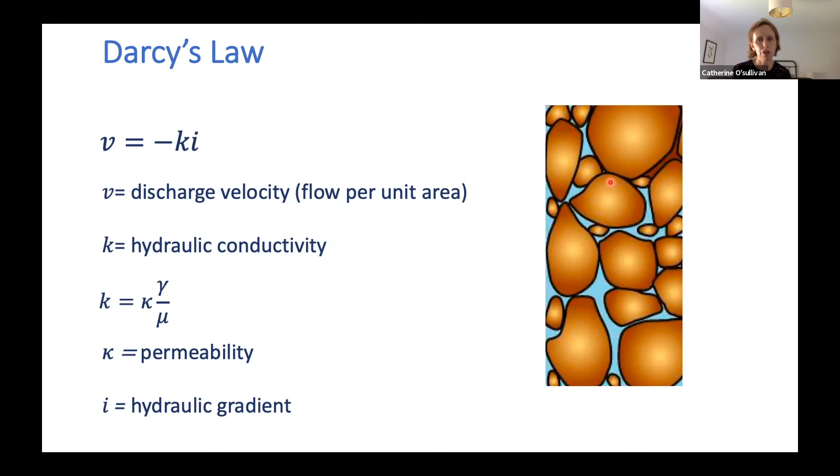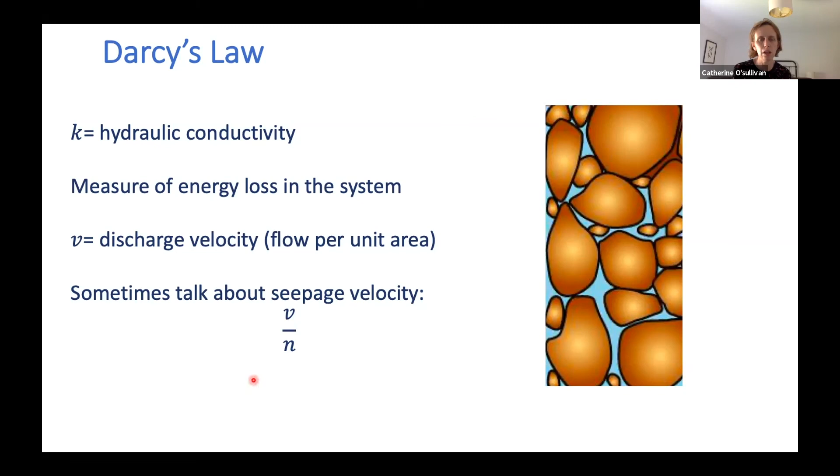And obviously, i is our hydraulic gradient. And when I'm teaching, I like to remind our students that that's really a measure of how the energy in the flow is changing as the fluid moves through our soil, and a cartoon here to remind us about what that might look like. So in geotechnics, we then recognize that this discharge velocity isn't really a velocity, and we could correct it and say, if we divide this discharge velocity by our porosity, that's the real velocity of the water within the pore space. So this is something that you will see in textbooks for soil mechanics students.

And as I've said already, for more than 15 years, I've been teaching a course that's solely dedicated to seepage and consolidation, or the flow of water through soil, to postgraduate students. And I designed this experiment using one of the pieces of apparatus in our teaching lab. This is a rigid wall permeameter. We've got manometers coming out at the side, connected here to these standpipes, where students can read the total head at various points along the side of the rigid wall permeameter, and then get an understanding of the relationship between this gradient and the flow rate, which they can measure. We have the flow coming through from the bottom, and then they can use a timer and a graduated cylinder to measure the flow coming out of the top.

But the thing I realized, more than 10 years ago, is that it's quite interesting to put two different types of sand into the rigid wall permeameter, a coarse sand and a finer sand, and to then ask the students, where is the flow fastest? And this really flummoxes them, because intuitively, a lot of them want to think about flow in the individual pores, and they recognize that these pores in the coarser material are more open compared to the pores in the finer sand. But yet they have Darcy's law, and they're unable to take Darcy's law intuitively and apply the principle of mass conservation to realize that the discharge velocity is the same in both layers. They really struggle with that. So intuitively, this macro scale description using Darcy's law, when students are forced to really think about things, it starts to break down.

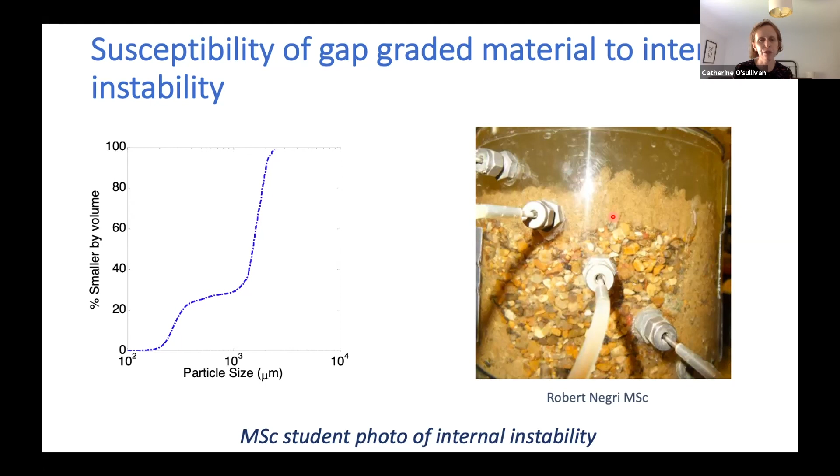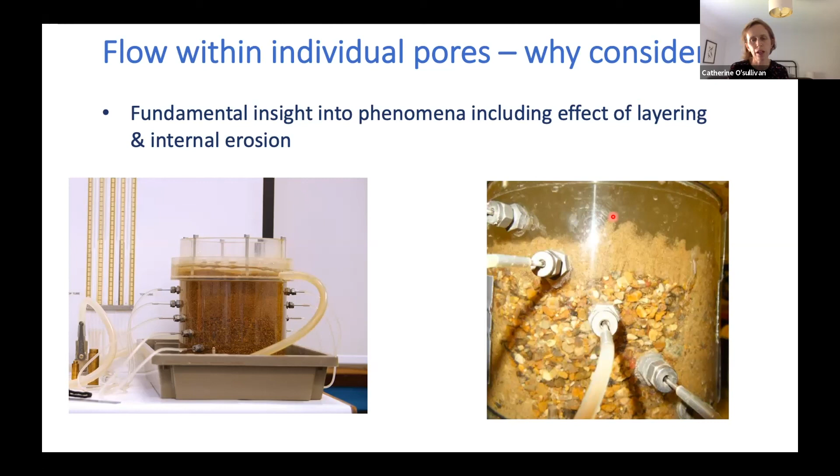And the most famous case study involving internal erosion is the near miss at Bennett Dam in British Columbia in the mid-1990s, where they discovered a major sinkhole caused by this. So these problems have real significance for our embankment dam and levee infrastructure. So that's why I think we want to be able to look at flow at the pore scale to aid our students' understanding of these phenomena, and then also to advance understanding and improve our ability to predict instabilities such as internal erosion.

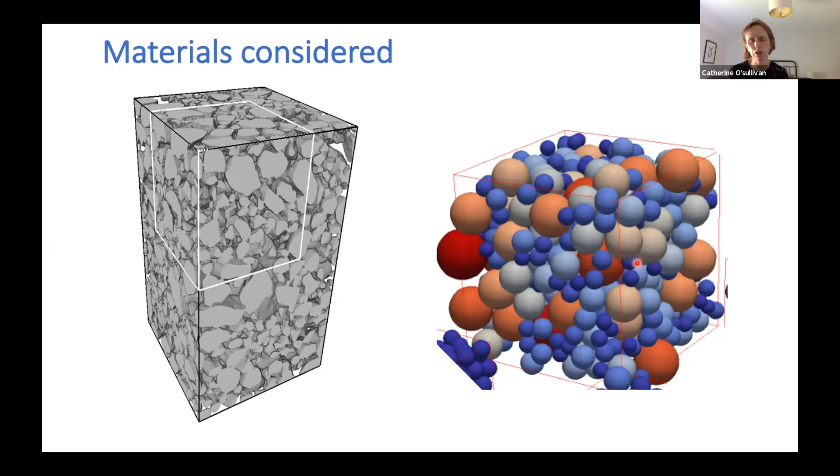So I'm going to talk about some experimental work carried out by a PhD student called Howard Taylor, and numerical work carried out by a PhD student called Chris Knight. Howard spent a number of years in industry before doing his PhD, so he approached this from a very applied perspective, while Chris was a physicist and looked at things from the perspective of a physicist. So two very different students, but looking at the same problem, and their two perspectives I think are quite interesting.

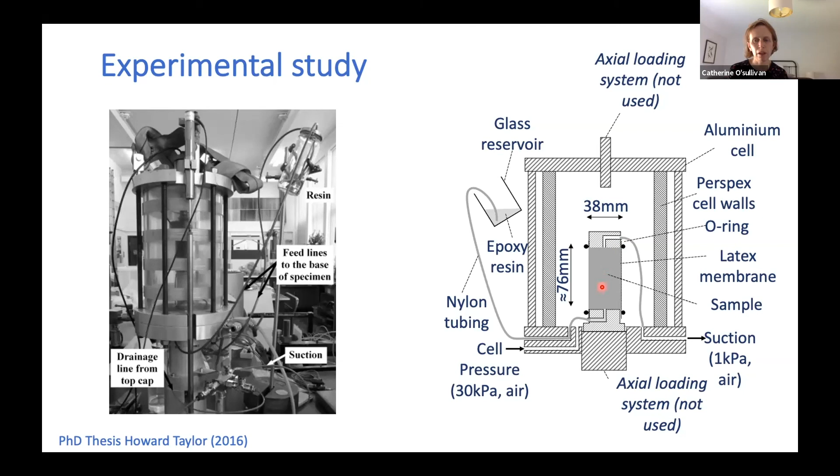So this is a photograph of the apparatus that Howard used in the lab. So he took a sample of sand and put it into a standard triaxial apparatus, consolidated or compressed it to a particular isotropic stress level, and then he impregnated it with an epoxy resin. So an epoxy resin was drawn up using a suction through the sample in order to glue the particles in place. He then took a subsample of this to a materials micro-CT scanner, and he used a scanner based at Queen Mary University, which is also in London, just a ride away on London Underground.

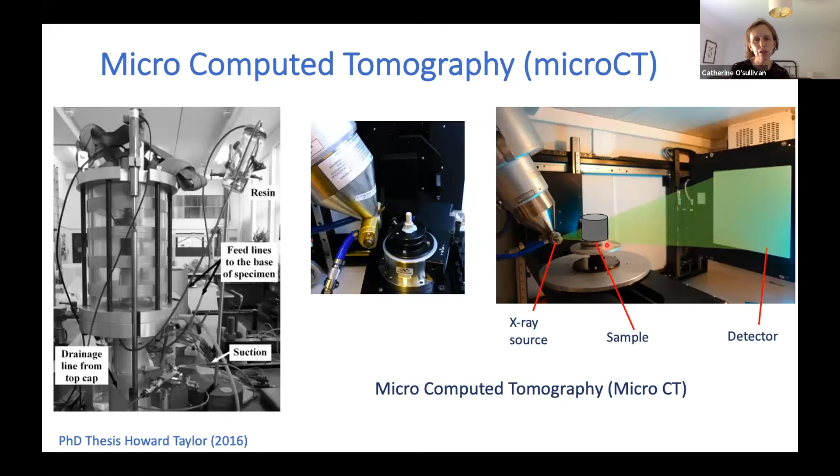And he put his sample between a source and a detector. And this sample was rotated in a controlled manner. And for every about 1 degree of rotation, a radiograph was taken. And so a radiograph is the kind of X-ray image that's recorded when you break your arm. But by taking these large set of radiographs, where the sample is rotated in a controlled way, we can get a 3D image or a tomograph of our material that allows us to look at the pore space in 3D.

And Howard looked at different sands with different coefficients of uniformity, or rather, I should say they're the same sand, they're both Leighton Buzzard sand with different CUs. And a CU of 3 means there's a broader distribution of particle sizes within his sample. And he also looked at some glass ballotini with a slightly different particle morphology.

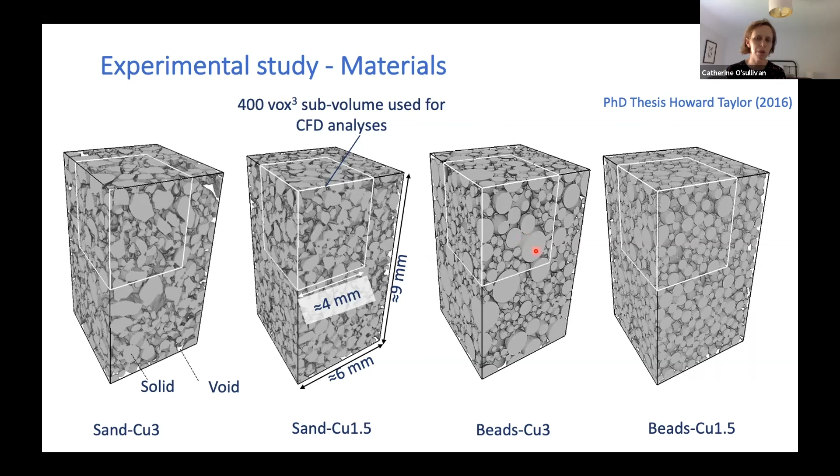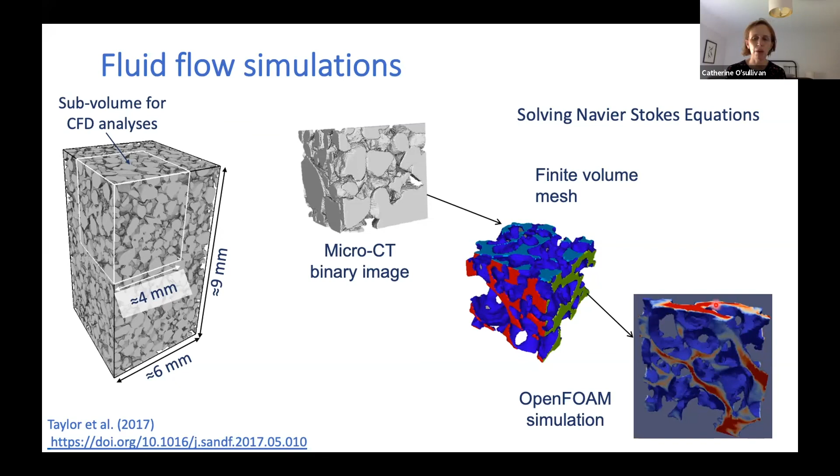And Howard took subsamples from these scans and used them as input to a CFD analysis. And in order to do that, he looked at the gray scale of the images and decided which gray colors are associated with the particles and which gray scale is associated with the voids. So he did what we call a binary threshold to segment the void and the particle space, and used that as input for his CFD analysis. So he did his binary image. He used a finite volume mesh within the image using OpenFOAM and solved the Navier-Stokes equations to get an understanding of the flow within the individual voids or within the pore space.

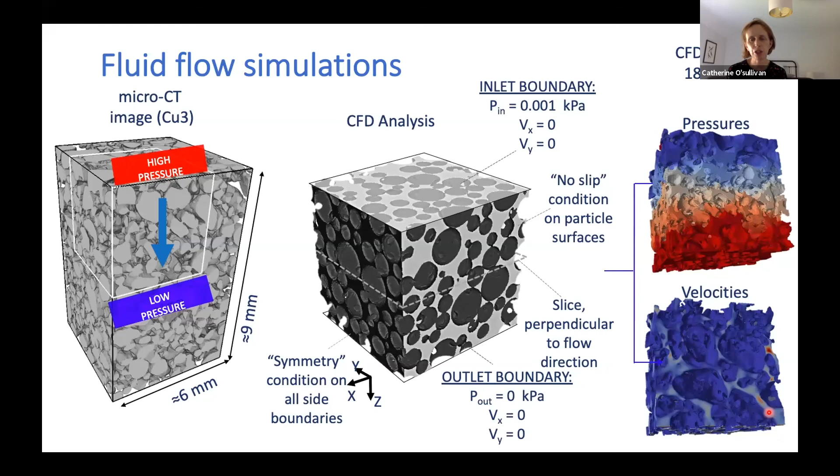So he simulated, in all cases, a laminar flow scenario where there was a pressure gradient applied across his sample. On the surface of the individual grains, he applied a no-slip condition, and he used a symmetry boundary on the vertical sides, and then flow moved downwards, as I said, under a controlled hydraulic gradient. So we have a controlled pressure gradient here. And from that, we can get a map of the distribution of pressure within the void space and also the velocity of flow. And I think that this kind of approach to looking at flow within a porous media is where we need to go to really understand these issues from a soil mechanics perspective.

Howard did some verification by carrying out some experiments in the lab where he did permeameter tests. And he confirmed that his lab results were reasonable when compared with the CFD results. Acknowledging, of course, we wouldn't expect a perfect match because you'll always have some boundary effects within the lab that would not be evident in your small subsample that were considered in the CFD analyses.

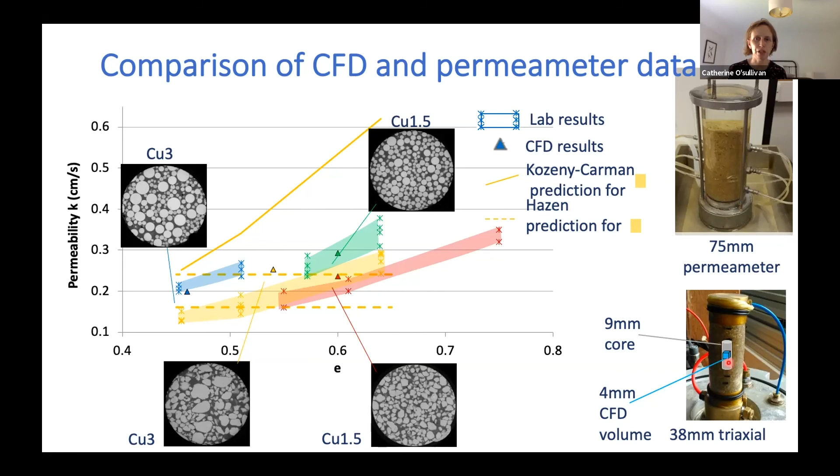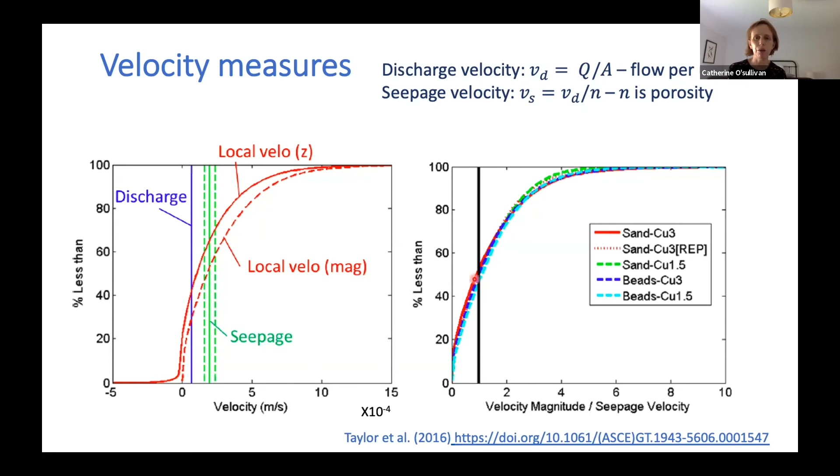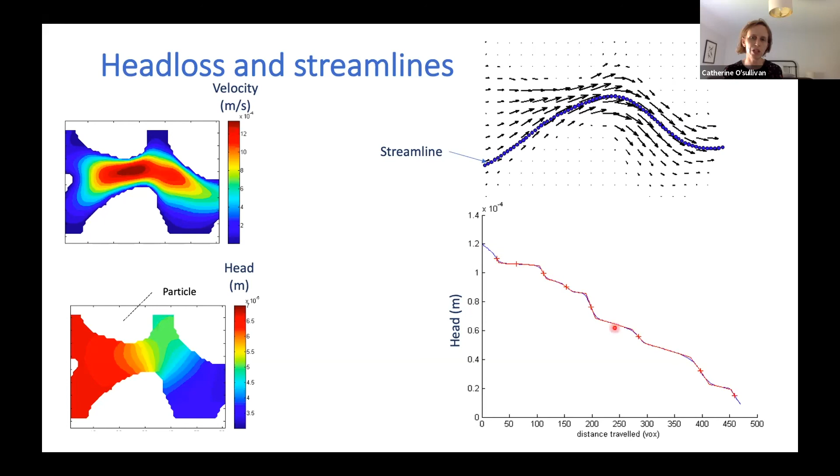And we can trace streamlines through the flow, and we can see that where we get the biggest head loss, or the biggest gradient in head, is associated with these constrictions.

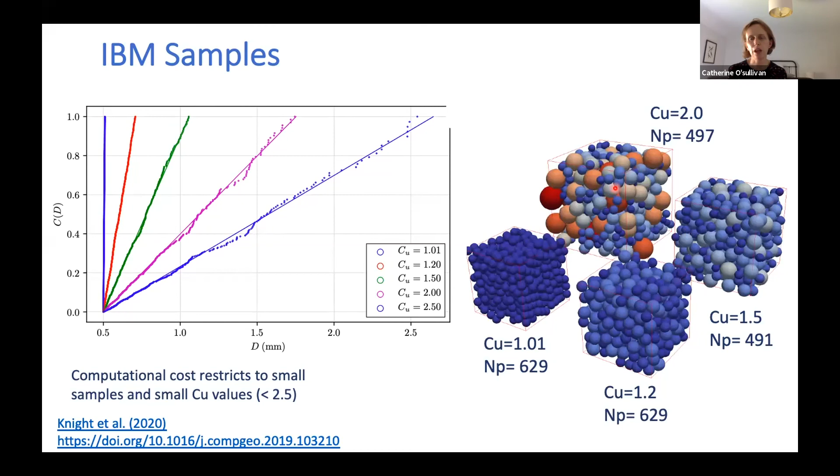Chris Knight, who's the second student I spoke about, he created his samples using DEM, and he simulated the flow around them using the immersed boundary method. Again, he's doing direct numerical simulation, but using the immersed boundary method to enforce the boundary conditions at the surface of the particles. And again, he traced streamlines through the void space.

He looked at where his pressure gradient was the largest, and using a triangulation-based approach to partition his void space, again, he found that where he had his constrictions, that is where two voids meet, that's where he gets the biggest pressure gradient. So by doing this sub-particle scale simulation, we're starting to get proper insight and confirm our hypothesis that actually underlies the Kozeny-Carman equation. So I think this is really important.

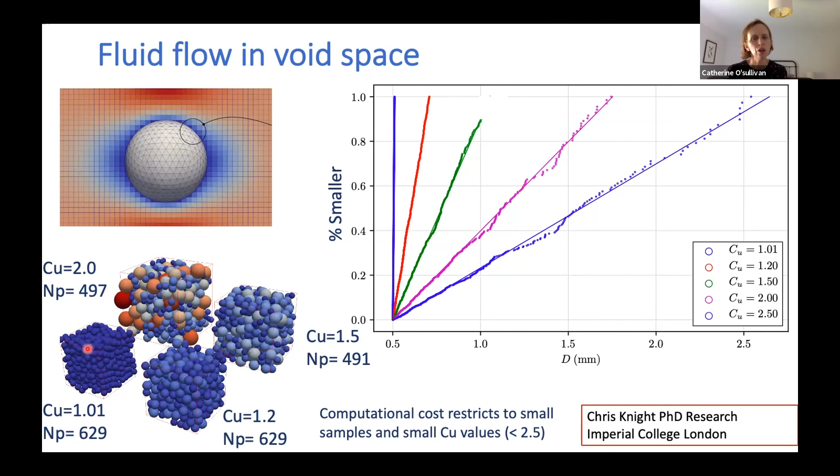These equations based on the monodispersed packings, they don't accurately capture the forces on the individual grains. They underpredict the force on the large grains, they overpredict the force on the small grains. And that's really important because if we want to simulate movement of particles using what we call unresolved CFD-DEM, we need to know these forces accurately. And I think this is an area of research we really need to pay attention to in soil mechanics.

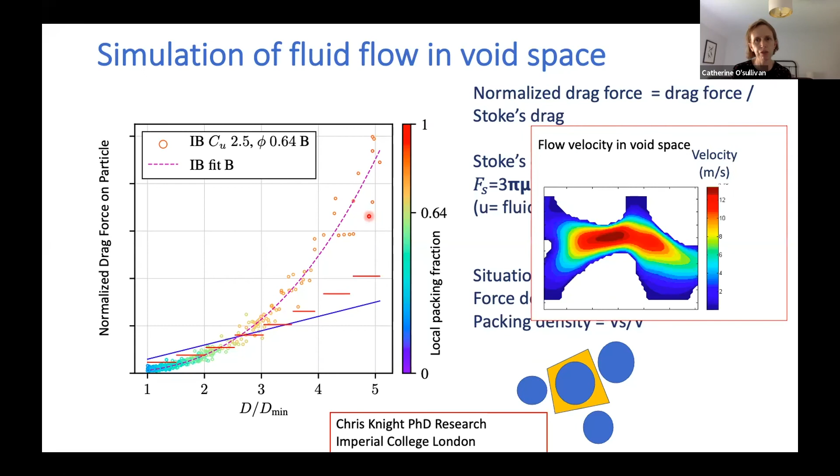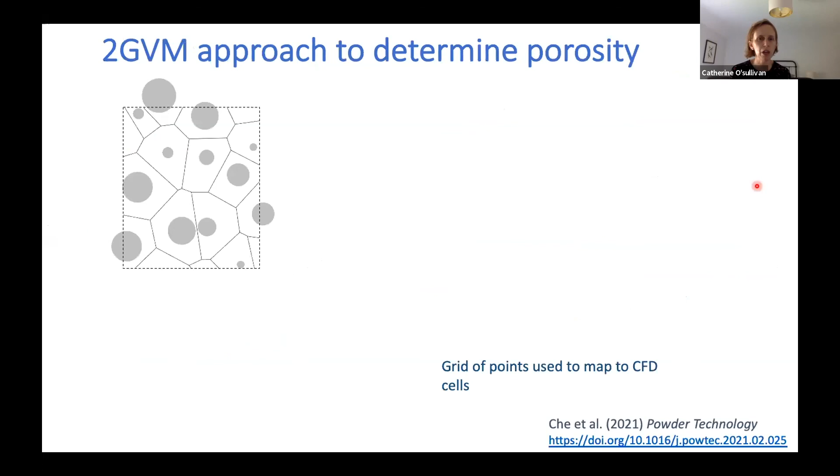And we really need to develop our ability to accurately measure, model and predict drag if we're going to look at the kind of issues I was talking about at the beginning, such as how flow heterogeneity can start to cause erosion in flood embankments. And we've been looking at different approaches to determine this in a computationally efficient way. We've been developing approaches based on Voronoi tessellation.

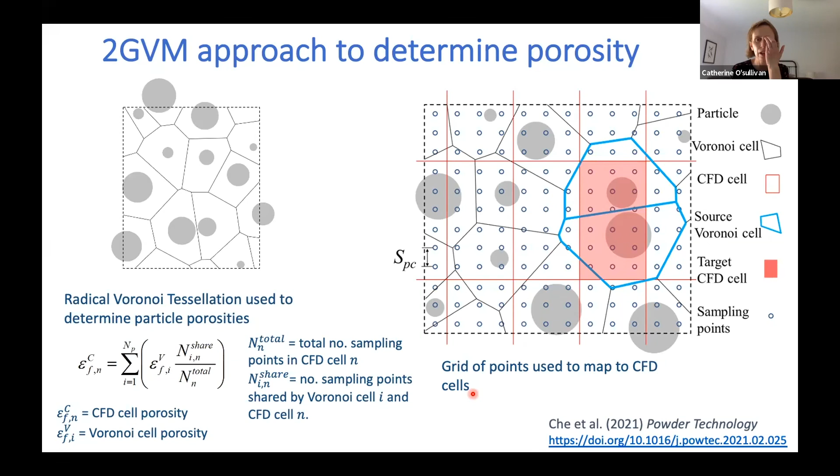But the key to developing these approaches that will allow us to go forward and make accurate predictions is having this information of fluid flow at the subparticle scale gained through solving the Navier-Stokes equation. So when we're looking at flow at the particle or subparticle scale, it's heterogeneous.

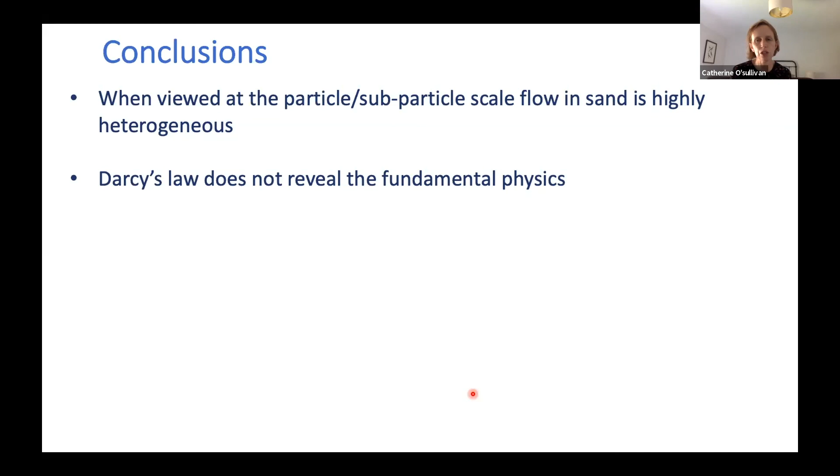Darcy's law doesn't reveal the fundamental physics. We hit that pretty quickly, as I said, with the students who start to get flummoxed when they think about flow from one sand to another. When we have these DNS simulations, we can get the data that we need to really understand at the particle and subparticle scale the flow around grains and the interaction of that flow with the particles and the forces that can lead to instability in granular materials.

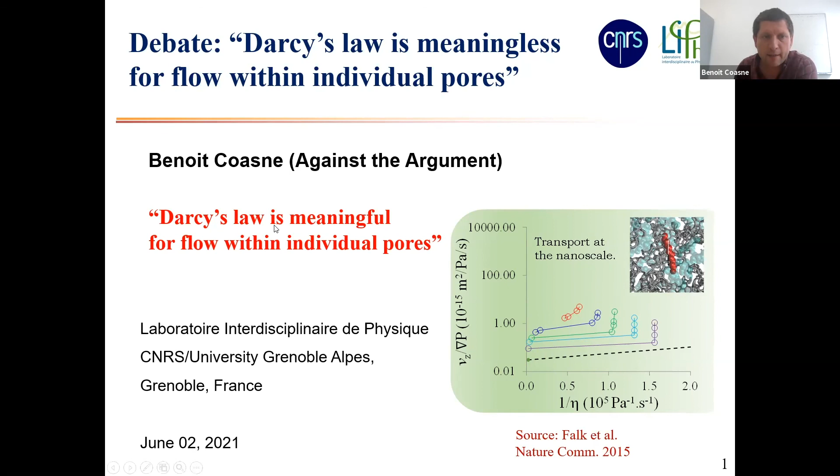So look, long story short, as you will see, I'm against the argument, and I'm going to try to bring what I would call the physicist view, but it's not only a physicist view, it's more like a microscopic picture behind Darcy's law, and I hope I will convince you that, in contrast to what was just said, I do think that Darcy's law is meaningful for flow within individual pores.

So, let me start. It's basically more or less the same definition as what Catherine gave, but I think it's important that I use my own words. As was said by Chloe in the introduction, Darcy's law, from a physicist point of view, is simply Onsager's phenomenological law for transport. So it relates the flow rate to the pressure gradient, which is the driving force that actually induces transport. And for me, the complexity is what do we put here in these prefactors?

Usually, from an engineering point of view, we assume that we have two parameters here. K is the permeability, in square meters because it's a cross-section area that conducts the flow, and eta is the viscosity, the transport resistance of the flowing liquid. So usually we assume that we can simply take the bulk values. One is a material constant, K, and the other one is a fluid constant, and we just put them together, and when it doesn't capture the experimental results, we say it's a failure of Darcy's law.

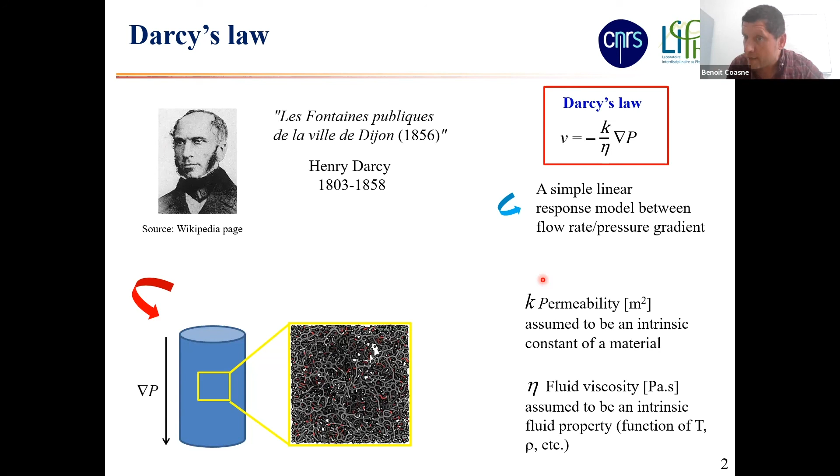But for me, it's not actually a failure because there's a strong background behind this Darcy equation. It's usually introduced as an Onsager equation, but you can simply rederive Darcy's law starting from the well-known example of Poiseuille flow. In Poiseuille flow, you start from the Navier-Stokes equation, which is basically a momentum conservation equation. You assume a laminar flow, so you can neglect the nonlinear contributions, and you simply solve this equation. For a simple geometry, like a slit pore or cylindrical pore, you end up with the parabolic profile that we all know from our textbooks.

Now, with the advent of nanofluidics, we realized something like 20 or 30 years ago that in some cases the no-slip boundary condition that we all use might not be relevant, and sometimes we can have slippage. And if you have slippage, you can explain, for instance, the large flows that have been measured in carbon nanotubes.

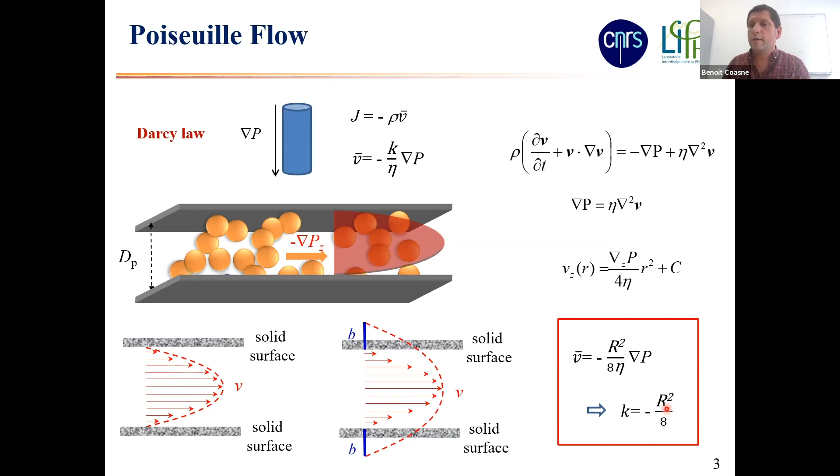But again, my point here is that from a very fundamental physics equation, I can rederive this Darcy equation. And in this case, it's well known that the permeability for a cylindrical pore is the pore size to the power 2 divided by 8. From a physics point of view, the simple scaling tells you that when you have a porosity of an average size D, the permeability should scale as the pore size to the power 2.

There are well-known limits to this linear Darcy equation. I don't want to go too much into detail because I don't think it's really part of the debate, but it's important to consider the well-known limits. A well-known limit, first of all, is the compressibility effect. When you have a large Mach number, the Mach number being simply the ratio of the flow velocity to the sound velocity in your system.

So what it means is that when this Mach number is large, it means that as the fluid is moving inside the material, it's actually producing a pressure wave, a compression wave. And for large Mach numbers, this pressure wave is actually affecting the fluid. But in most liquid applications, we're usually at small Mach numbers, so it's not really relevant.

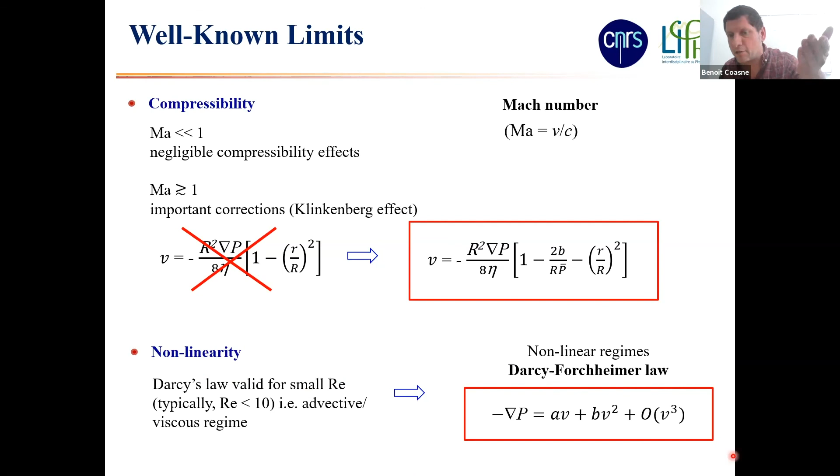The second known limit is the non-linearity. So for instance, if you have a gas, if you have a small Reynolds number, well, typically you remember in the previous slide, I said, if you can neglect the nonlinear term, you end up with Darcy equation. But of course, if you have turbulences, if you have this convective term in Navier-Stokes equation, it is no longer valid to simply assume that the flow rate is proportional to the driving force. And you have this extension, which is known as the Darcy-Forchheimer law. Okay, that was well-known limits.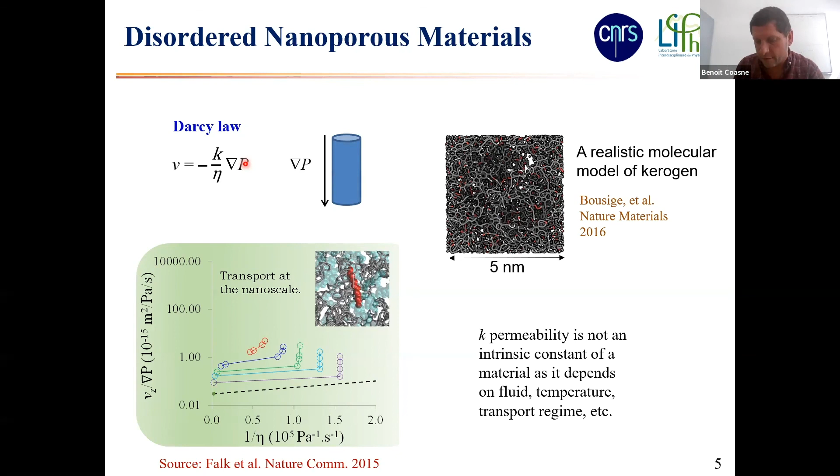The only problem is we don't know what to put for the viscosity and for the permeability, and this is where your trouble starts. There is some physics; it's just not obvious what physics we should put in these numbers. So I don't want to go too much into the detail, but the fact that the permeability depends on the fluid and is no longer an intrinsic property of the material is actually something you can predict, because Darcy law can be re-derived from Stokes' equation, where you neglect the convective part.

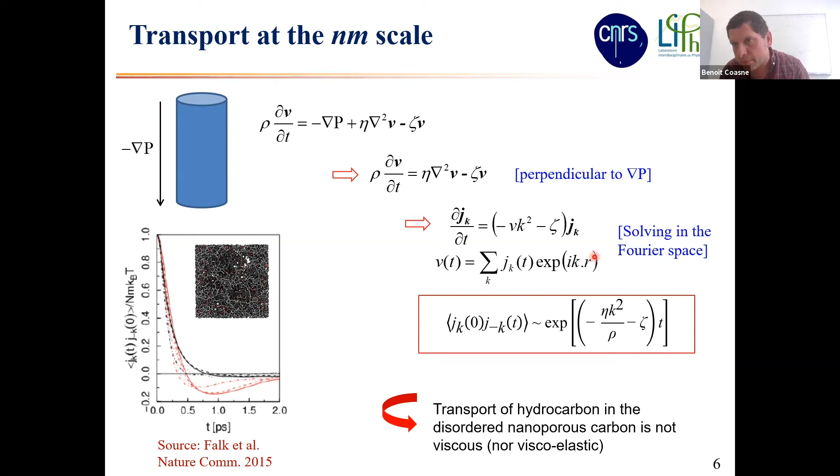And if you solve this equation in the direction perpendicular to the driving force, so you get rid of the pressure gradient, you solve this in Fourier space, and you predict, and that's a very important hydrodynamic result, that the time correlation of the Fourier component of the flow rate should decay exponentially with time. And when you look at these time response functions for fluids in strongly disordered and nanoporous materials, you observe a complex behavior that does not match this simple viscous flow hypothesis. So the Darcy law linear response between flow rate and pressure gradient applies, but because of this non-viscous, complex behavior of the confined fluid, the permeability becomes a complex quantity to predict.

And in fact, if you want to understand in very simple words, you can consider the following argument. In this equation, which is a macroscopic or mesoscopic equation, you actually compare two quantities. This is the momentum transfer, and those are the different forces applied to the fluid particle.

And here, this term is the stress relaxation, it's the viscosity contribution, okay? So when you use this classical mesoscopic equation, what you do is actually to assume that the time scale it takes to transfer momentum between fluid particles is extremely long compared to the time scale it takes to relax the constraints within the fluid particle, okay?

So, as I said, the viscosity, we know from statistical mechanics that it's directly related to the stress correlation function inside the fluid. For most liquids at room temperature, we know that the typical relaxation time is of the order of 1 picosecond. It is extremely fast from an engineering point of view.

For the momentum transfer, and that's related to this Fourier component contribution that I discussed before, we can predict from this exponential term that the typical time scales like this. So that's the fluid density, that's the viscosity, and K is the wave vector over which you're transporting your fluid particles. So when you do classical hydrodynamics, by construction, it's a macroscopic theory. So you're looking at small wave vector, meaning large distances, macroscopic distances.